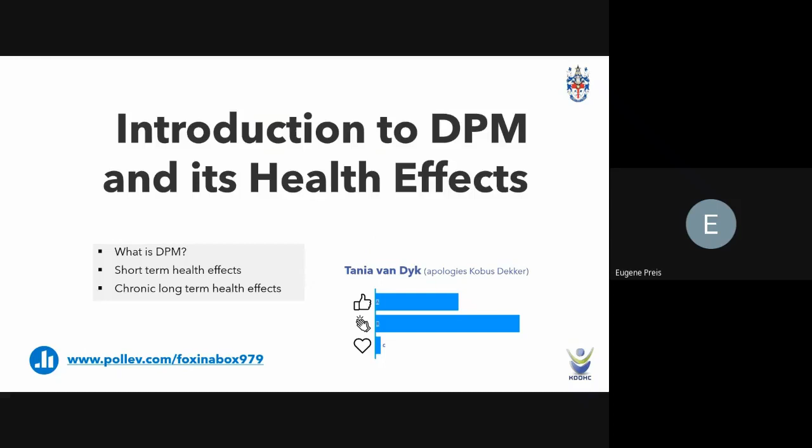What Tanya is going to cover in this section is answering the question on what is DPM, what are the short-term health effects, and what are the chronic long-term health effects. Again, due to a slightly late recording, we missed Tanya's first slide, so on behalf of Tanya, I will just run through this slide for the recorded version purposes.

So we start off this session answering the question, what is DPM? Diesel particulate matter is defined as ultrafine, for example, to have an aerodynamic fraction of less than 1 micron, allowing it to penetrate the lung alveoli. Although the classification of whole DEE exposure as carcinogenic by the International Agency for Research on Cancer only occurred in 2012, the concerns about the health impact that manifests from DEE exposure can be traced back to the 1950s, so it's been going on for a very long time already. The gases associated with DEE, primarily nitrogen oxides or NOx, sulfur dioxide SO2, carbon monoxide CO, and carbon dioxide CO2, are not classified as carcinogens, however have various other health risks ranging from irritation, pulmonary pathology, and chemical asphyxiation.

DPM, therefore, is a complex and variable mixture of gases, vapors, and particles, as you can see on the figure there. Next slide.

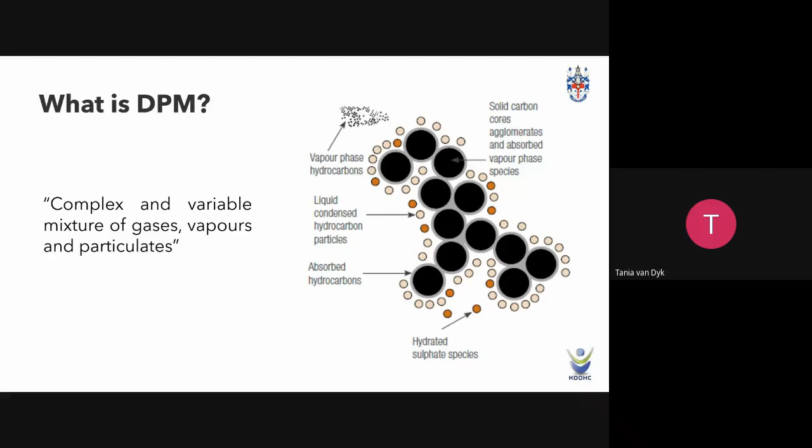So we mentioned that diesel exhaust is classified as carcinogenic and not DPM itself. But since it is very complex to measure and analyze the full content of diesel exhaust for vehicles, DPM was selected to be measured as a surrogate for diesel exhaust. Currently, the magnitude of carcinogenity for diesel exhaust is not confirmed. In other words, we know it is confirmed as a carcinogen, but we are not sure to what extent. Next slide.

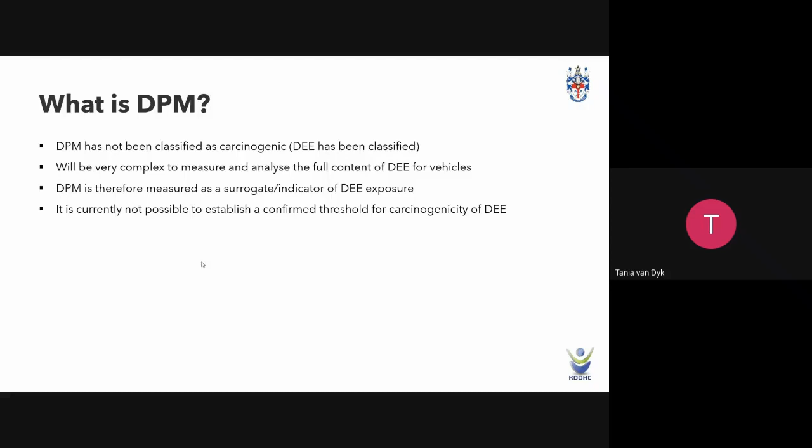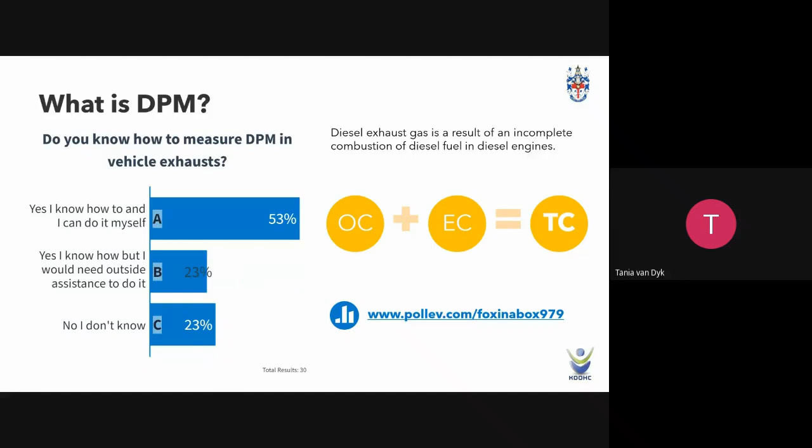So we mentioned that we use DPM as a surrogate to measure diesel exhaust. The reason being that it is a result of incomplete combustion of diesel fuel in diesel engines. In other words, it is selective to incomplete combustion processes specifically. So when we look at the components, we say it consists of an organic carbon and an elemental carbon portion, which adds up to total carbon. We used to look at total carbon as the marker because it represents about 80% of DPM, which makes it a good marker or a good surrogate to measure for.

I see most of you already looked at the question there. At this point, on the left-hand side of the screen, you can answer the question: do you know how to measure DPM in vehicle exhaust? It looks like a lot of us do measure this and do know how to measure this.

Yes, thank you for those responses on the screen. So this was our first in-content question as we discussed earlier on. So you'll see this is how we have brought in the interactivity in the workshop. So as we go through content and you see a question on the slide, whilst the speakers are presenting, you can put your answer in. And if applicable, the speaker will just make a comment or two on this.

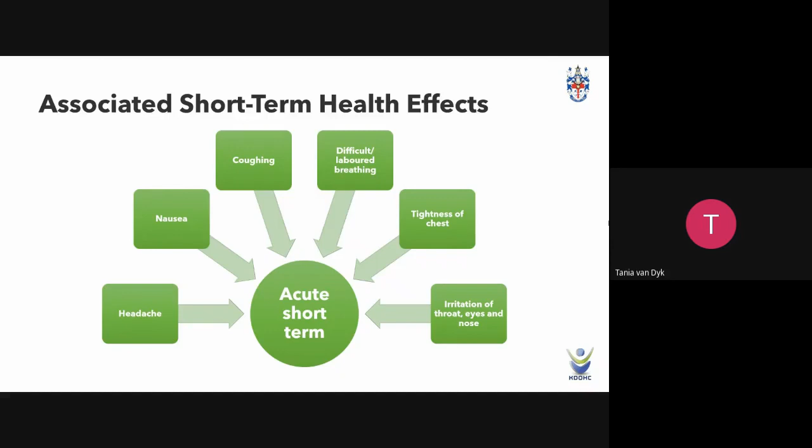Okay, so if we look at the health effects for diesel exhaust, the short-term health effects associated with diesel exhaust may include headaches, nausea, coughing, difficulty breathing, tightness of the chest, and irritation of the nose, throat, and eyes. Next slide.

We know the carcinogenicity of diesel exhaust is the most prominent chronic or long-term health effect. And apart from lung cancer, it can also be associated with cancer of the bladder, the kidney, and the pancreas. Other chronic health effects include asthma, cardiovascular disease, and cardiopulmonary disease, which can include bronchitis and emphysema.

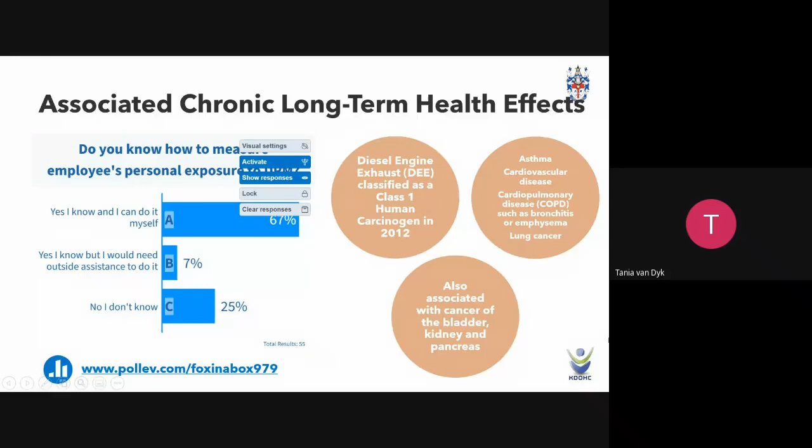So this actually concludes the health effects and the background that I have to say. And then the last question there, do you know how to measure employees' personal exposure to DPM? Okay, thank you from my side.

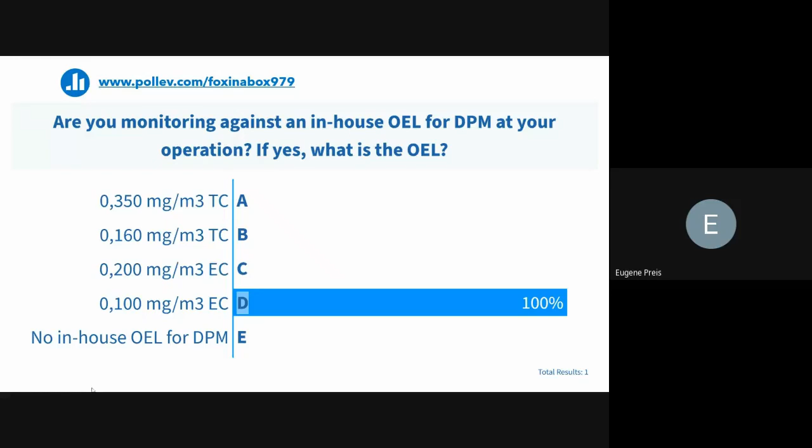So in terms of exposure limits for diesel exhaust, unlike South Africa, internationally, the various countries do have exposure limits and leading practices regarding exposure limits for diesel exhaust. And since diesel exhaust is classified as carcinogenic, the approach in general internationally is to ensure that when you measure levels, they are as low as possible. The context of limits of the various countries is basically based on legislation as well as workplace and economic factors.

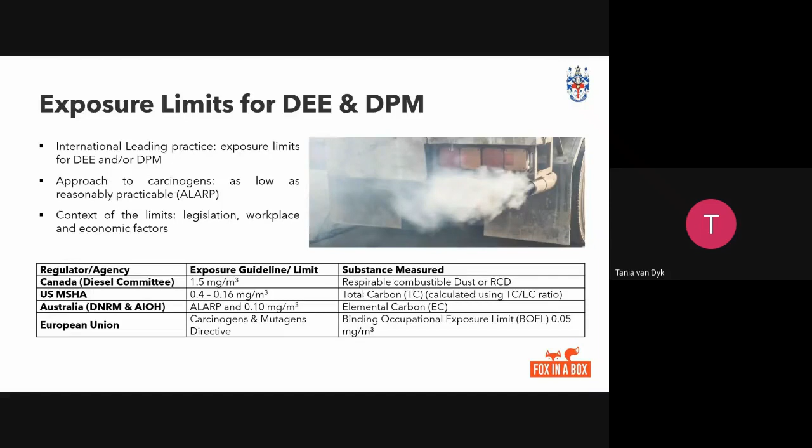The Australians use a limit of 0.1 milligrams per cubic meter measured as elemental carbon, and then the Europeans basically refer to the directives in terms of carcinogens and mutagens. They don't really refer to a specific limit as such. So we can see internationally, although relatively diverse, they do have reference to OELs for diesel exhaust. So the next slide, Eugene.

So we know now where we stand with the rest of the world in terms of OELs for diesel exhaust, but where does South Africa stand in terms of exposure limits? Currently, you won't find any OELs for DPM in the Mine Health and Safety Act. The only reference to limits are the ones for the gaseous component, and that is in Schedule 22.9.

The Mine Health and Safety Council, however, issued an advisory note in 2013 where they proposed a phased-in approach to gradually decrease limits from 0.35 milligrams per cubic meter to a limit of 0.16 milligrams per cubic meter, measured as total carbon over a period of time. So it's like milestones that were set where they want us to reach a limit of 0.16 milligrams per cubic meter.

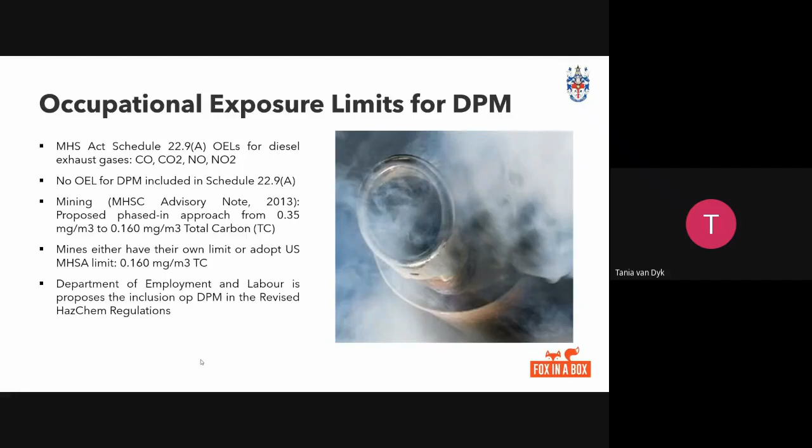So this is the approach from the mining perspective, and from the Department of Labour's perspective, they also propose to include DPM in a revised HazChem regulation. That's still in process. So the next slide.

The Mine Health and Safety Council launched a project whereby the current airborne pollutant exposure limits are reviewed, and although not finalized, a workshop was held in October 2020, and the following recommendations were made regarding exposure limits for diesel particulate matter. They recommend, firstly, the inclusion of DPM as a new pollutant in the Mine Health and Safety Act Schedule 22.9. They also recommend the limit to be 0.16 milligrams per cubic meter, measured as total carbon, as well as a respirable fraction. And they propose to note it as a confirmed human carcinogen as well.

So this is basically a summary of where we stand currently in South Africa in terms of OELs for diesel particulate matter.

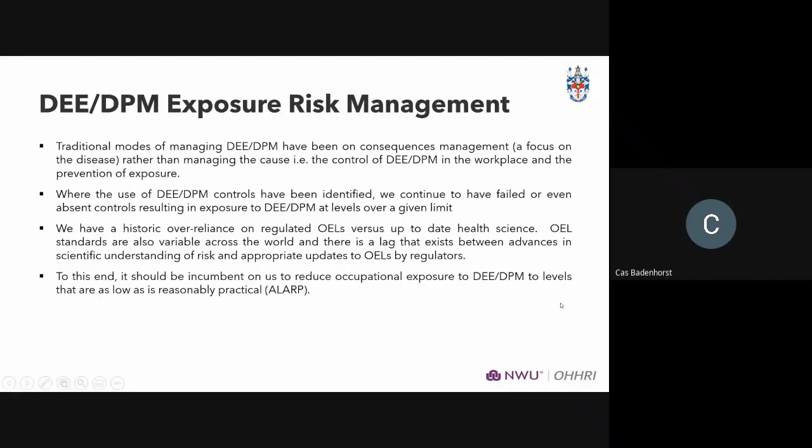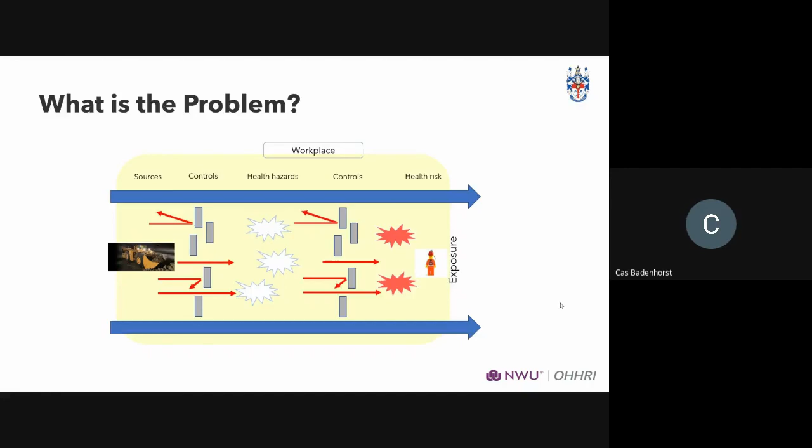Okay, so whilst you get going with the questions there, in terms of DPM exposure risk management, we use exactly the same tools that we'll use for any other airborne pollutant or health hazard we deal with in the workplace.

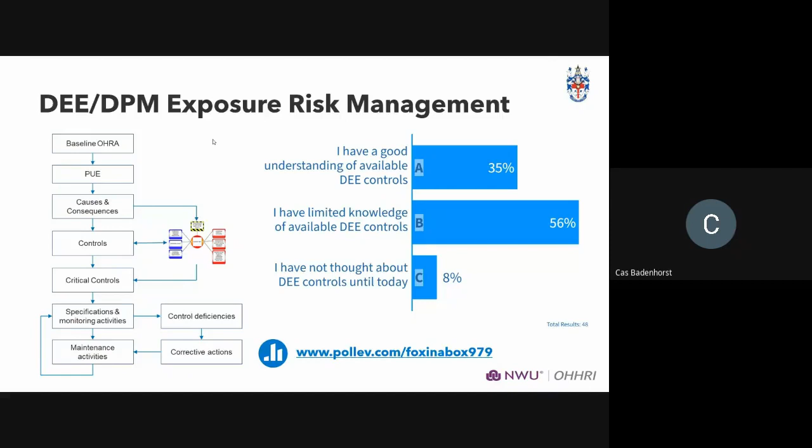So just to simplify that very complex flowchart there, we've got an unwanted event in the middle. The unwanted event in this case is actually DPMs being emitted from an engine. That results, as I indicated previously, in a hazard, being DPM presence in the workplace and employees getting into contact with that DPM. We can either put in some controls that will prevent DPM being emitted from the engine, so that is our preventative controls. Or we can also put controls on the right-hand side to actually eliminate or manage exposure if we can't prevent the emission. Those are called mitigation controls.

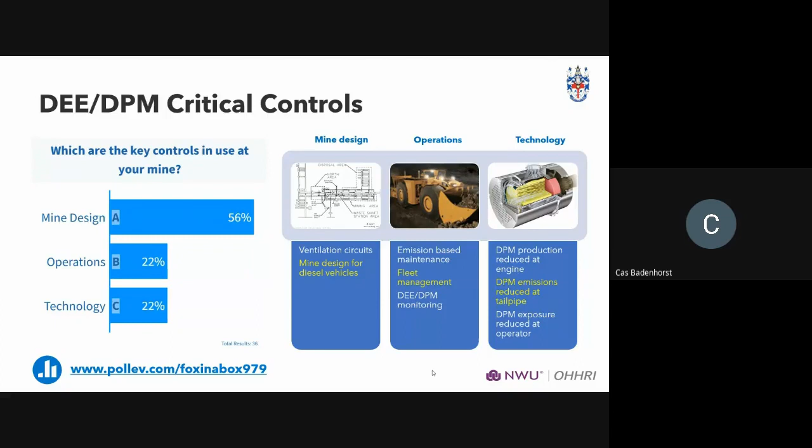I think at the time, the industry realized that it is quite a challenge and we need to join hands and partner up with equipment manufacturers. Next slide.

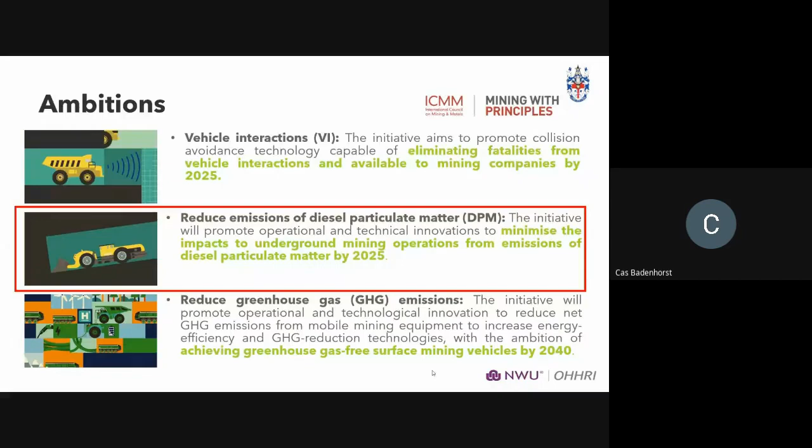So this is quite a unique supply chain collaboration. And I haven't seen many similar collaborations across the world, where it's actually led by the CEO leadership from the participating mining companies, as well as the CEOs from the OEMs. So at the highest level of an organization, these initiatives are driven, and it just demonstrates the initiative's importance and helps to accelerate the pace of change.

Secondly, it's a safe space for OEMs and mining companies to work openly, to help develop solutions and overcome silos within the industry and between companies, while still operating under anti-competition and antitrust rules. And thirdly, this collaboration represents a third of the mining and metals industry, giving the ICMM convening power in achieving these ambitions, as it builds the widespread confidence needed to accelerate the level of innovation investments required to scale up commercial solutions.

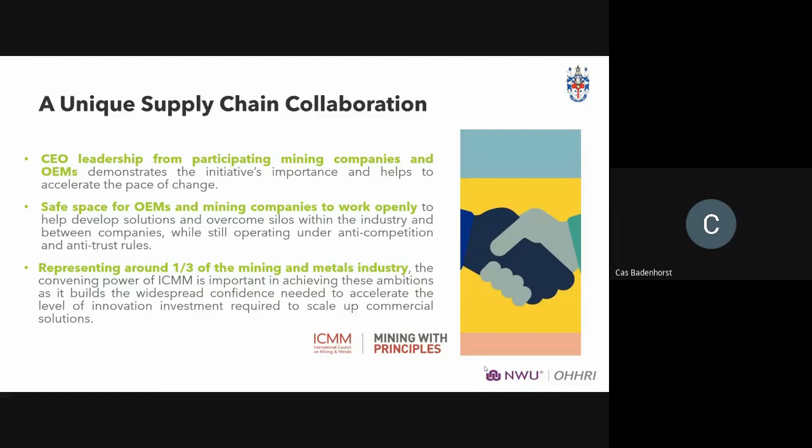So very often in the past, what we've experienced is a single company talks to a single supplier to try and address the issues. And for these big equipment manufacturers, there's no commercial power in listening to one customer. But when you pull all the customers together and all the suppliers together, you're having a much different and much more enriched discussion around getting to a solution. Next slide.

So quite an innovative approach was followed. Quite a large group of these partners got together in London about two or three years ago, representatives from the mining houses, representatives from the equipment manufacturers, both health and ventilation colleagues, but also engineering colleagues, maintenance colleagues. And the group spent about three days together to really unpack DPM and DPM generation, not only from a mining operator perspective, but also from an equipment manufacturer's perspective.

The workshop then spent time to understand what needs to be done, and how do we collaborate in getting it done by 2025. From that workshop and discussions, there were a number of controls identified which the industry, together with the equipment manufacturers, believed would provide the biggest impact in the shortest time span. Next slide.

So all of that is actually available on the ICMM hub. ICMM refers to it as a knowledge hub. You can see the link there. You can follow that link, and that will bring you to a landing page, which is the copy here. And you don't need to be an ICMM member. This is in public space.

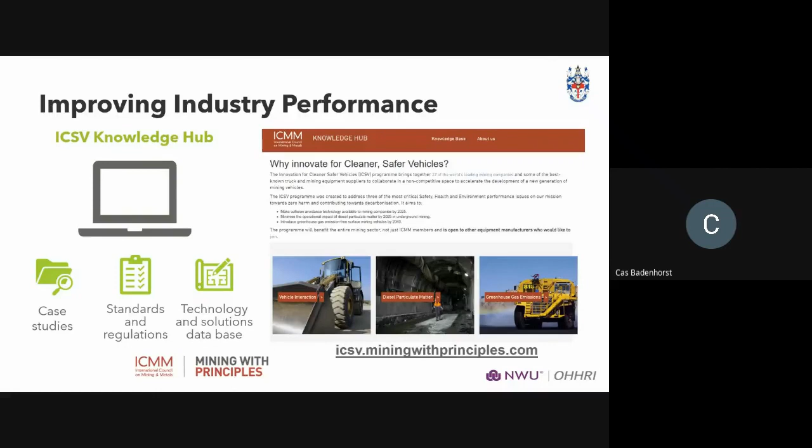What we've developed is referred to as a DPM risk management maturity framework. Under this ICSV initiative, we developed maturity frameworks as change tools for mining companies to map current positions, motivate action, and measure progress.

You can use this tool to start building your business case or value case for your manager, site, or company on how to change and mitigate your DPM in the long run. We've got three main buckets of controls: mine design, operations, and technology. Under them, substreams like ventilation circuits, supportive infrastructure, fleet management, exposure monitoring, DPM production reduced at engine, DPM emission reduced at tailpipe, and DPM exposure reduced at operator.

On the columns, we show what each of those controls would look like at its most immature level, level one, basically how the control looks when you've got nothing in place, up to a top level of maturity, level five, where we've got zero emissions. So how would we expect ventilation circuits to look at zero emissions, or how would your fleet management look? On the website, these are all interlinked, so if you click on any highlighted item, it takes you into the underlying definitions and explanatory notes of exactly what it means.

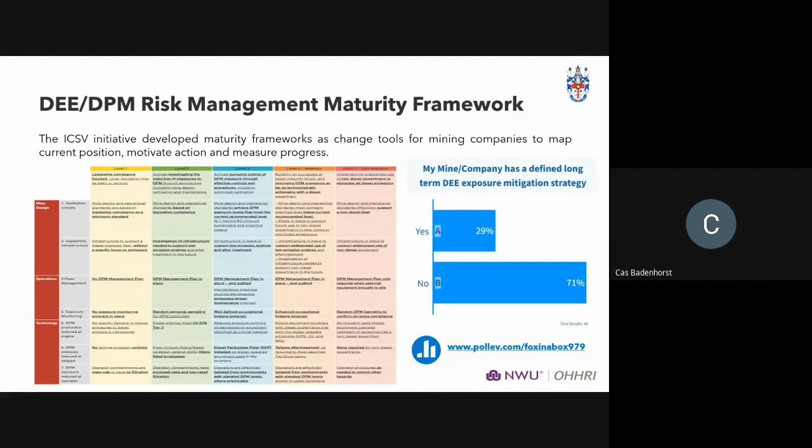As an example, I've taken the engineering control version and blown it up a bit. Looking at DPM emissions reduction at tailpipe: at level one maturity you'd have no tailpipe emission controls, at level two there are some more controls, level three even more, and at level five, zero emissions, you actually don't require DPM tailpipes because you're on non-diesel powertrain arrangements.

With this, you can benchmark your operations or site against this self-assessment. This is an example from one of our Anglo-American operations, where red indicates the current status of that operation as of 2020. We've plotted it in a simple view, and then shown where we want to be in the next few years.

This also gives you the opportunity to decide which controls to push hard, since some current operations restrict certain controls. For example, in DPM exposure reduced at the operator, that refers to enclosed cabins on diesel-driven equipment. The current status at that operation is open cabins, since it's a low operation. But changing the equipment or mine design to make enclosed cabins feasible is not a feasible option.

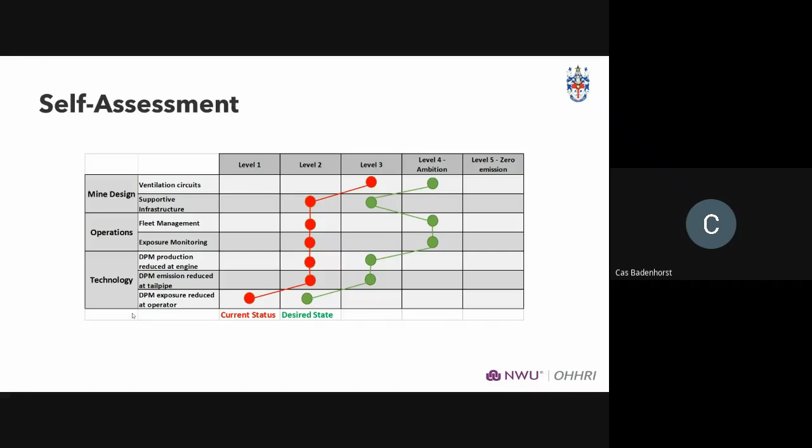So some of the takeaways from my side: I think we really need to understand the controls available to us, and that one is not better than the other. Marco will share a lot of information with us around what controls are out there and how to manage them. I think it's important to understand where you are as a company or site in terms of your maturity towards elimination of your exposure to diesels, and where you want to be by when.

I think it should be a discussion around the business value and the impact of the various controls as well, so it's not just around putting a control in place. The study I referred to earlier, the case study, is available on the ICMM website. It's a case study from Wollongong University with a South 32 operation down in Australia.

And the focus was around the value of emission-based maintenance as a control for diesels or DPM emissions. The study has clearly shown that by having a detailed emission-based maintenance program, firstly you actually reduce the number of breakdowns you've got in the phase, therefore increasing operational efficiency and operational time.

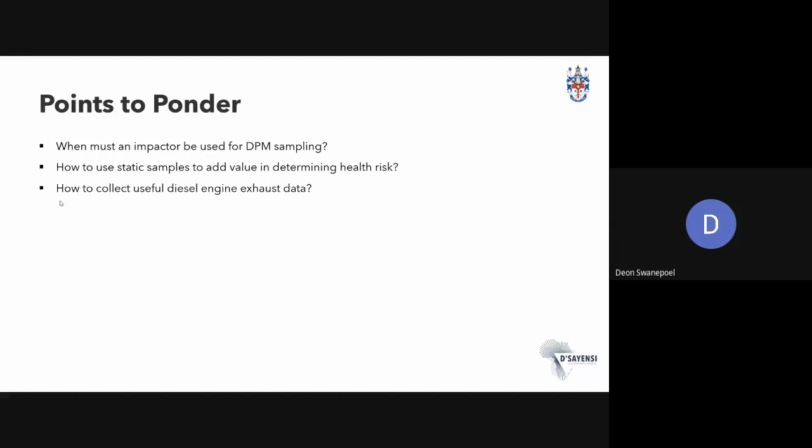This session I'll be looking at personal monitoring, including inorganic gases, organic vapor, and the DPM portion, and then also the fundamentals of source monitoring. As a disclaimer, today's session is geared more towards transferring knowledge to our young professionals - the 50% of people who say they are not 100% comfortable with DPM sampling on their own. But I do hope there'll be some knowledge for everyone, a key takeaway.

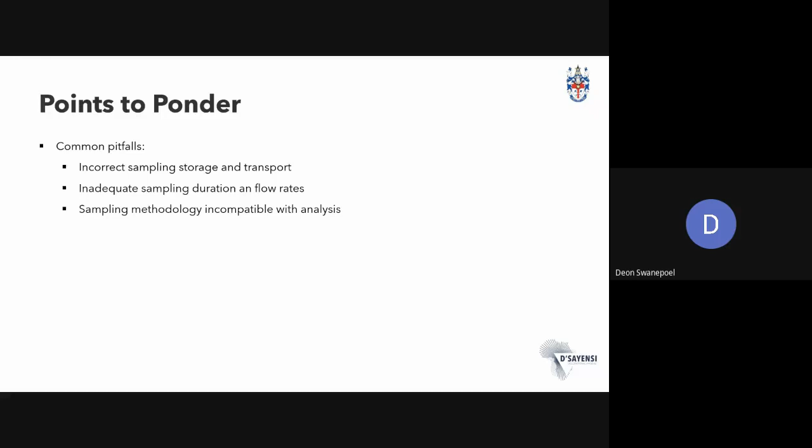The very fundamentals of exposure monitoring - we take our samples within the breathing zone, so we have a 30 centimeter semi-hemisphere from the nose. Hand in hand with that, our sampling duration must be sufficient to represent our exposure duration and to collect enough of the pollutant we're investigating. This principle applies for all the hazards that pertain to diesel engines.

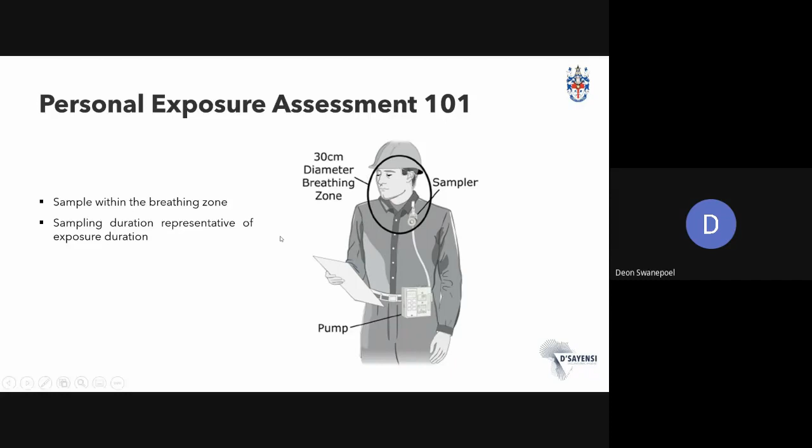When we look at our inorganic gases, carbon monoxide and dioxide, we most commonly use direct reading instruments for monitoring. I'm not sure if you ever wondered why - my takeaway is a high dose will induce an immediate effect that could be fatal. Actually, we want immediate results, we want early warning, a warning before a person is exposed to a high dose that could be fatal or have an acute health effect. We don't want that information two weeks after the exposure occurred. Where we anticipate high nitric oxide or dioxide exposure concentrations, it's also recommended to use a direct reading instrument. Alternatively, there are passive and active sampling options for NOx sampling.

When we look at organic vapor, for volatile organic compounds, we have an option of either an active or passive sampling method. NIOSH 2549 is an active sampling method, and what's cool is it's a screening method that quantifies a large range of compounds, including benzenes and aldehydes, both associated with diesel engine exhaust. For polyaromatic hydrocarbons, the method I'm most comfortable with is NIOSH 5515. It uses a filter and a sorbent tube in series - the filter collects the particulate PAH portion and the sorbent tube collects the more volatile portion. I'm not aware of any passive sampling options for PAHs.

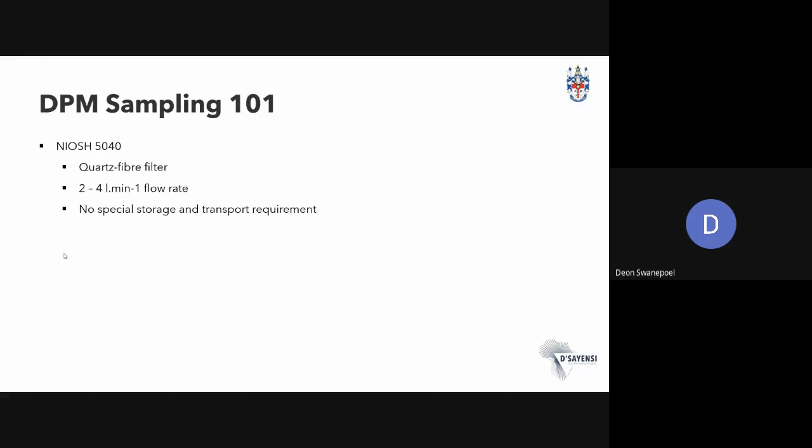So the good news is it doesn't really make a difference to the results which approach you use. A study done by Pretorius and Grevie indicated that all three methods would give you similar results. So it becomes a question of dealer's choice. Something to take note of, open face sampling is prone to tampering either by adding foreign particles or operators with curious fingers that start poking at your filter. Personally, I'm a fan of using a cyclone, and the reason is you get a more even deposition of the pollutant across the filter. And also it prevents them wandering fingers from fiddling with your filters.

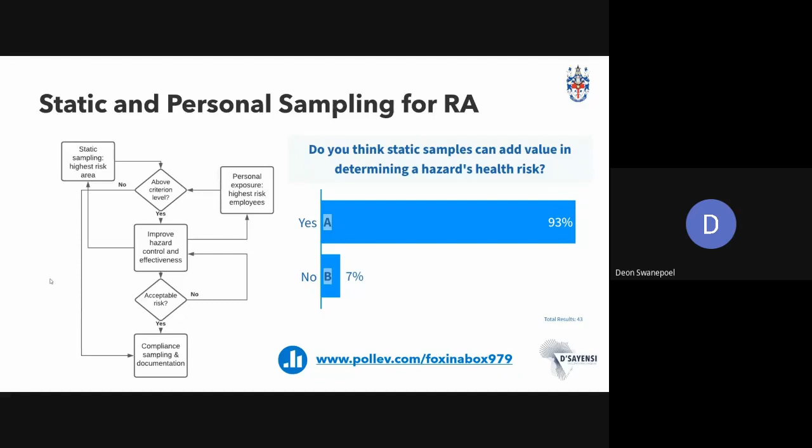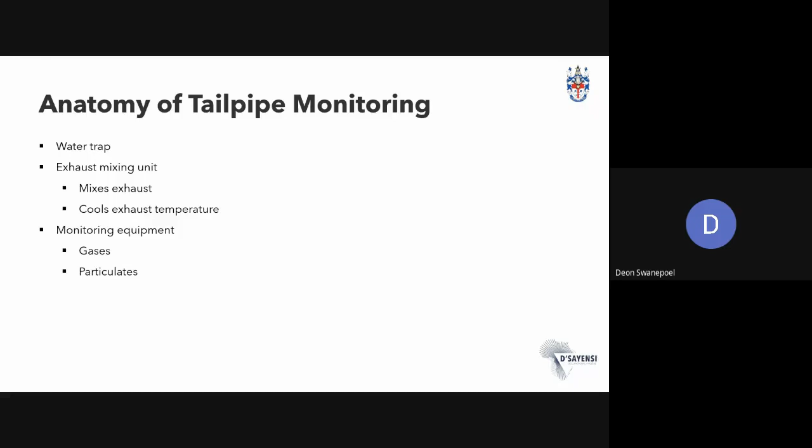Cool. Next slide, please. We're going to move over to source monitoring. The basic constituents of tailpipe monitoring are a water trap, and the name is fairly self-explanatory: it reduces the moisture in the exhaust. An exhaust mixing unit, whose purpose is to get our exhaust gas mixed homogeneously and also to cool the exhaust gas temperature. And the final component is our monitoring equipment for either the gases or particulates that we want to investigate. Fantastic. Cool stuff.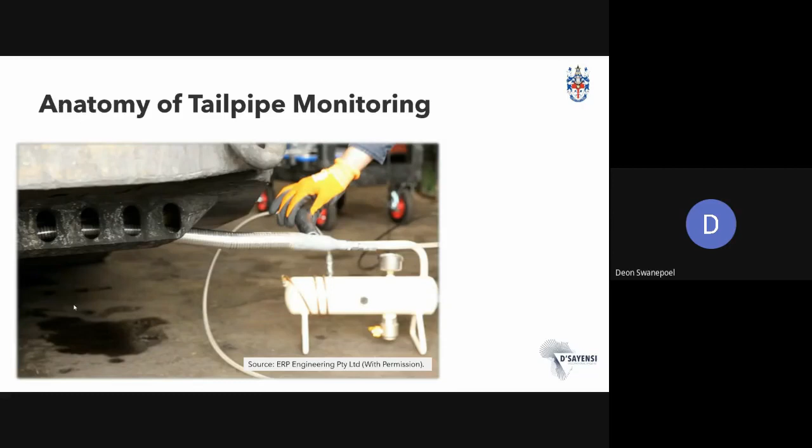Thanks. So here you can see a probe going into the tailpipe, and from there, off screen, it will go into a water trap and then into the mixing unit in white at the back with the copper heatsink. So this is almost the ideal approach. And what you'll find quite often is that the probe is directly connected to a gas or other instrument, which I'll elaborate on a bit later, but it's not good practice. The next slide, please.

So here you can see all the different components of a tailpipe monitoring system. At the right, the silver is the water trap that reduces our water vapor. From there, it goes into the mixing unit that also cools the exhaust temperature, and the hazards we're looking for, the components of the diesel engine exhaust, are measured from the mixing unit. So it's not directly measured from the tailpipe.

So some of the biggest pitfalls that I've encountered so far is measuring with the probe directly connected to sensors from the exhaust. The first reason it's a problem is there's a good chance you're going to burn your filter, your sensors. Then there's also virtually no repeatability or intra-vehicle comparison, because your velocity within your exhaust changes if there are any bends in the system.

So if you're taking a measurement directly from a tailpipe, there's a good chance that the placement of your probe will influence your results, which is not scientific at all. The reading can't be dependent on the placement of the probe. And if you're going around a bend, you'll have different velocities and different mass flows, which will in the end influence your results. Eugene, just go to the next slide for me, please.

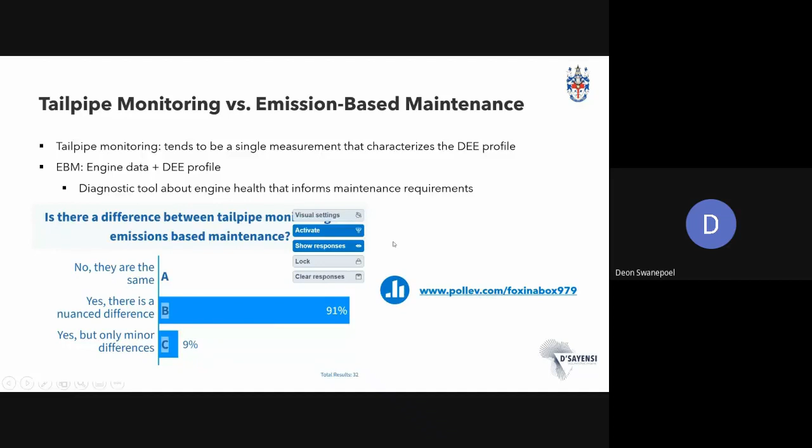So you get a diesel engine exhaust profile. You get an idea of what is coming directly from your engine, be it your particulates, carbon monoxide, and then one after the after treatment. So if you don't see a reduction before and after your after treatment, you know that either you've got a blown out filter or after treatment, or there could be various other mistakes. But the point is, it gives you something to compare to, as opposed to only taking one measurement and making a call whether you're happy with the result at the end. So definitely

even though we use it interchangeably, emissions-based maintenance is definitely a broader program. The whole purpose is to make a decision regarding maintenance and how to change that profile. So it's not a once-off measurement that you've evaluated against a specific criterion. You could have internal standards to evaluate it against. That's not the problem. The point is, especially if you're using technology, you want to have an idea of how well my engine is performing, how well my after treatment is performing. I think that this should be my last slide.

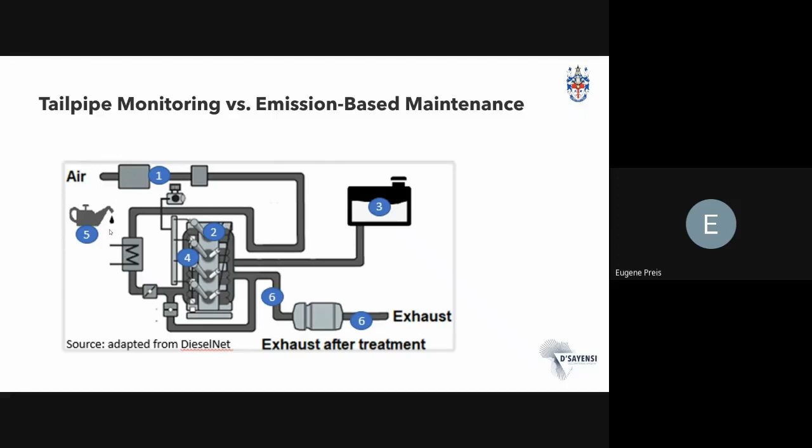Deon, before we check, just a comment from Marco in the chat box, saying he also agrees engine duty cycling also plays a part. And that was your last slide, but you're welcome to add to what Marco said if you see it fitting. I don't think I can really add anything. I mean, he's absolutely correct.

Thinking about emissions-based maintenance in the broader scheme of things, it also contributes to what Prof. Kas was saying a bit earlier. The first form of control, one of the steps of control, is to get your engine to emit as little as possible. So directly from your engine, you want to have as little carbon monoxide as possible, because that means you actually have proper combustion. So that's where your fuel consumption saving will come from. You want to have your particulates as low as possible from the engine.

And then only after that, your after treatment comes into play to further alter or manipulate the constituent that you are having control over. So no, completely agree with what he's saying. It's a fascinating topic, but it's definitely not just a quick jam a probe with a sensor into an exhaust tailpipe, get a result, and then move from site.

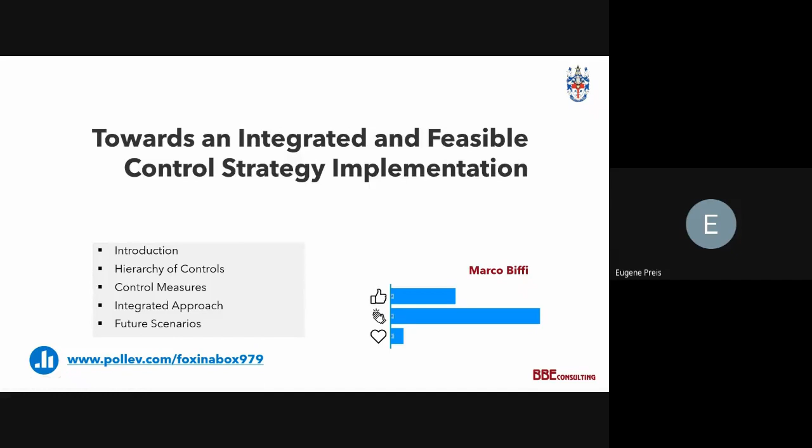Thank you, Eugene. Good morning, everyone. I'm Marco Biffi. I'm a mechanical engineer by training, but I spent over 35 years in mine ventilation and a couple in industrial ventilation and air conditioning systems. So what it means is that I am a jack of all trades and definitely a master of none.

And I hope that going through this presentation, it's going to help putting together some of the thoughts that I've had over the years and shared with the likes of Prof. Badenhorst. We started looking at this, I think, in about 2009. And we finished doing this together in 2019 when we started with the ICMM subcommittee. And then I retired after that.

So we'll go through a brief introduction. We'll look at the hierarchy of controls, and I want to take this from a different angle, perhaps than what Kas has covered. And then line up with an integrated approach. In doing the hierarchy of controls, can you go to the next slide, please, Eugene? I want to look at things also from a perspective of elimination very briefly.

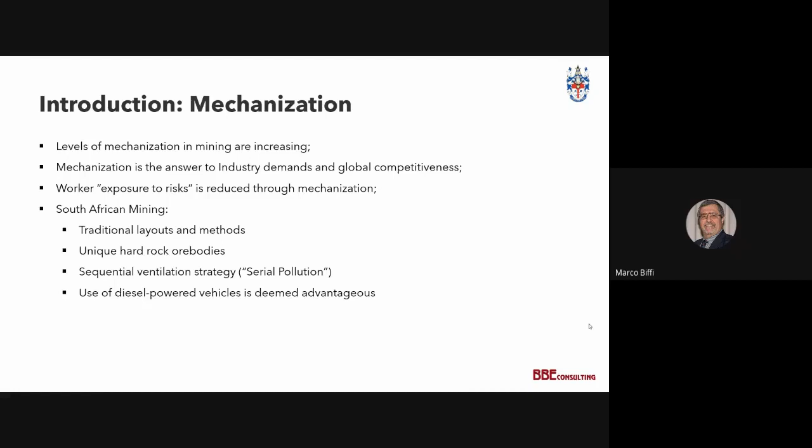So in terms of the hierarchy of control, in terms of elimination, we will look at diesel-free equipment, and that's something that we need to perhaps consider for new projects. And there may be some answers there that don't necessarily mean batteries. Anyway, we would like to then, in terms of substitution, look at diesel engine technology options, which you'll see package everything in one.

In terms of engineering the existing equipment, we should be looking at low-emission diesel fuels, lubricants, and additives. Anything that gets burned in that engine could become a nucleus for the attachment of carbon, metals, and other substances that can then enter the lungs. Exhaust after treatment is a very good way of handling that.

Equipment maintenance, in terms of emissions-based maintenance systems, as was discussed earlier, and of course that needs new competencies and equipment, and ventilation system design. Again, if we could use ventilation on demand and bring in fresh air for every panel in a bord and pillar platinum operation, we would have a lot less in terms of problems than we're having at the moment.

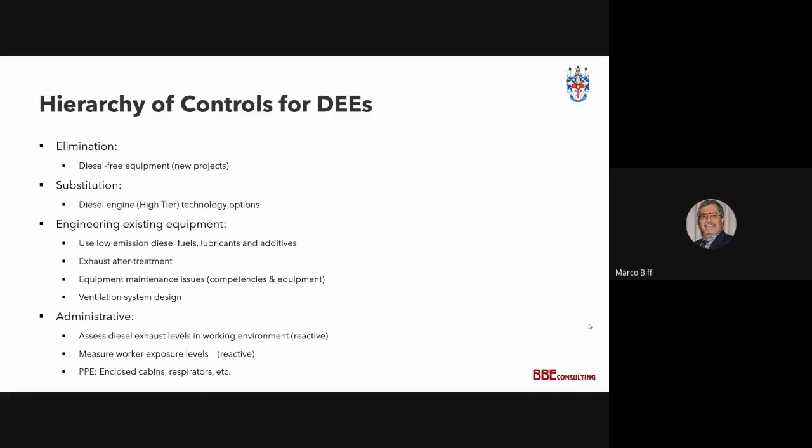So where we are at the moment is that we have mobile equipment and we use tier 1, tier 2 diesel engines. We can talk about tier 3s in a second. And we go to 50 or even 10 ppm diesels in the hope that will improve things. Exhaust filtration is added in most cases, especially the older equipment.

And if you're in a narrow reef operation using ultra low profile equipment, you will find there is usually a problem to fit exhaust filtration systems after the machine has been manufactured. And failing which, we try and dilute as much as possible using ventilation, and hopefully we're using air that's not being used somewhere else where a diesel engine was operating, and then we go for respiratory protection if that is necessary. And you'll see that we can use enclosed cabins, if necessary, as well with filtration.

Next. Now, going a new route is very similar, but we can use higher specification engines, which are kind of pre-packaged, if you will. And as I said, we'll chat about it in a second, with ultra low particulate diesel. Next, please. Alternatively, you can look at electric, which means battery or fuel cell driven.

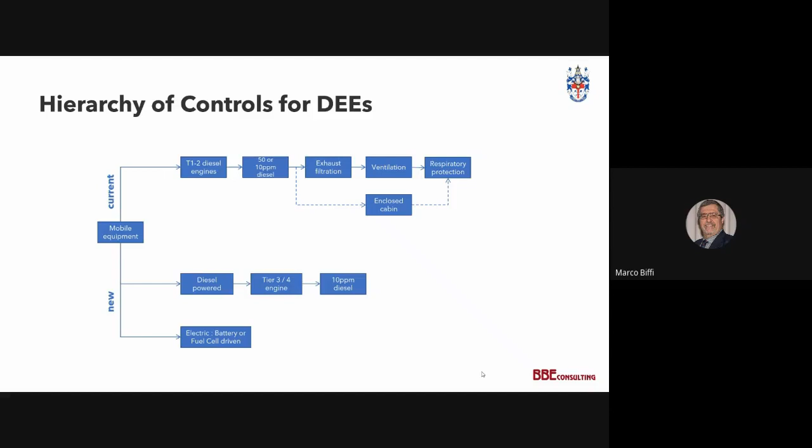Next, at the moment, we are stuck in what I call the diesel paradigm, certainly for the short to medium term. Next, please. So let's start from the bottom. What can we do right away? In my opinion, electrical hybrid units are probably the best. If you think of this LHD as a good tram, even in our narrow reef operations, they've come to substitute scrapers. So it just moves up and down in a straight line from the bottom of the gully and tips into the ore pass. There's no reason why we could not tether the unit by means of an electric cable.

And what I mean by it is a small diesel engine, which will allow the unit to move from one gully to the next. But when it does mucking and loading, that's when the most diesel emissions are generated. That's when the most heat is generated. So if we can do that by means of an electric motor, which is plugged into the wall, why not? Next slide, please.

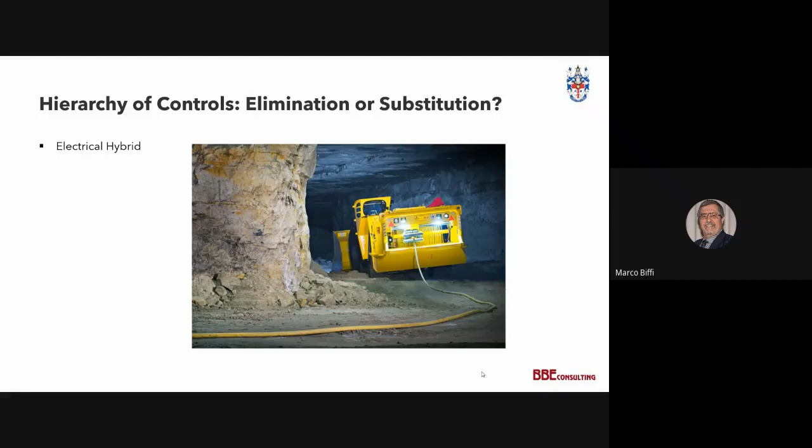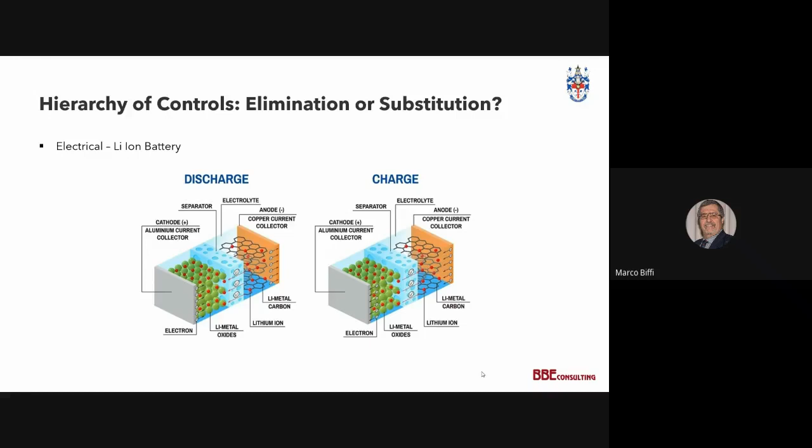Okay, let's very briefly talk about lithium-ion batteries. Lithium-ion batteries are basically rechargeable units. We use them in our cell phones. We use them just about anywhere. And it's just a question of running a current through to charge it, and then when it discharges, it will do the work that is necessary. Next slide, please. Okay, let's concentrate on the picture on the left, which is less busy than on the right.

Fuel cells. Fuel cells are an electric absorption system. The fuel that comes in on the left at the top is a metal hydride, which releases hydrogen as it goes past the anode. And that is due to the presence of a catalyst, a platinum catalyst. Now the hydrogen is then split into electrons and positive hydrogen ions, as you can see there. The electrons basically go away and do what electrons do in a current, which is move the motor and return to the cathode.

The hydrogen ions then migrate to the cathode inside the cell, and we then supply air, as you can see on the right-hand side, which is rich in oxygen. And again, through the action of another catalytic membrane, the oxygen reacts with the hydrogen ions to produce water vapor, which gets out of the exhaust. Now, the only other thing that needs to happen is that the fuel that you see leaving on the left-hand side at the bottom has to be recharged with hydrogen, which is this metal hydride fuel. It's almost like you have in refrigeration absorption plants where you have ammonia being desorbed at different temperatures.

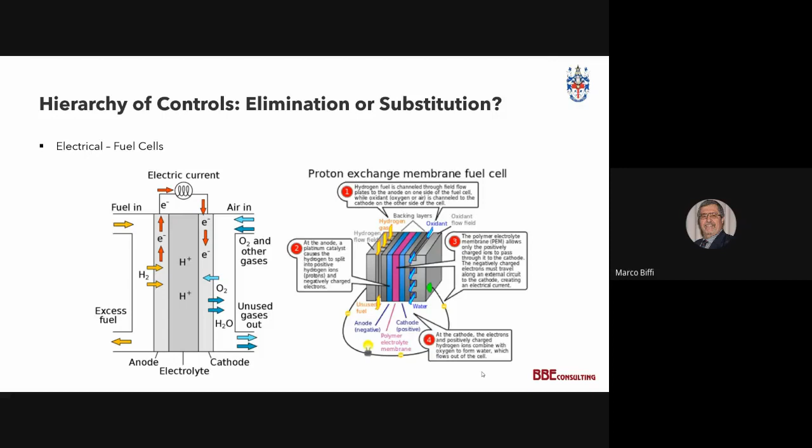The point I'm making here is that somewhere along the line, in the mine or on the mine, there has to be a metal hydride tank to be able to replenish the hydrogen.

So far, if we're talking about elimination, it requires quite an intensive and effective change management effort. Will take time, resources, and planning. It's starting now, especially if you're working on an operation which has 20 years ahead of itself. It's mechanized with diesel. You can maybe schedule the entry of electric equipment into your mine, with an exchange when the diesel equipment is due for change.

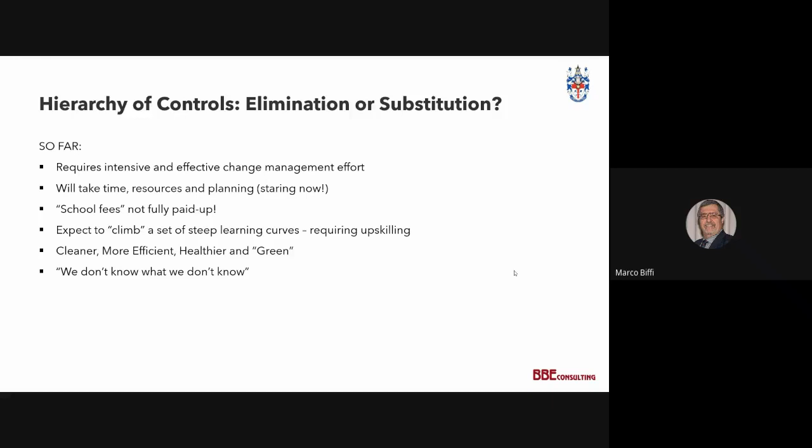Next slide please, I think it's a question. So the question is—sorry, Eugene, you take over at this point. Thanks, Marco. You're welcome to proceed, but I'll take this one.

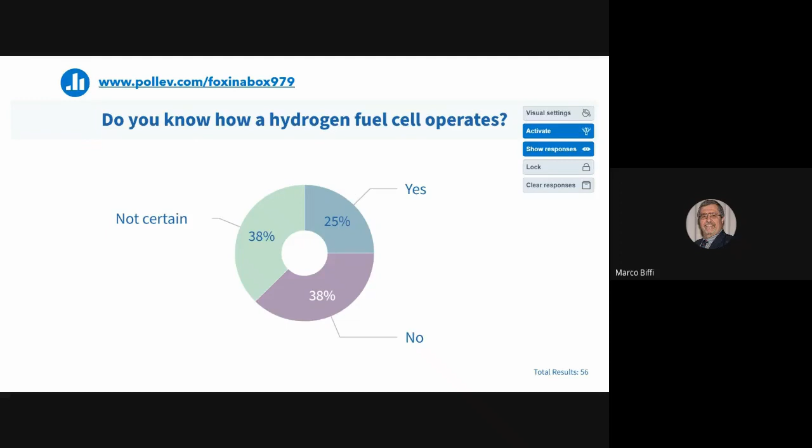What I wanted to say with the next slide is that we don't know what we don't know. And this is what happens. This is probably the first battery electric vehicle fire on record, or at least it has been investigated. What it is, it's a cassette unit. The engine is up in the front, so the battery is sitting in the front.

There are 3 batteries, and on the right is a picture taken by the 2 technicians who were there when the fire started, and they were fortunate enough to take this picture and come out of it alive. This is in North America, by the way. What happened here is that the battery released all the energy stored in those 3 batteries in a very short period of time. You can see the rubber and everything else burned on the left-hand side, but the back of the unit is pretty unscathed. The fact that these guys were sitting at the back meant the airflow was from their back towards the fire, and that's why they made it out alive.

But again, it's things that we need to learn about how to manage these very, very powerful batteries.

May I suggest that even batteries used in normal diesel units should have some kind of fuse. If they start running away, they release quite a lot of energy.

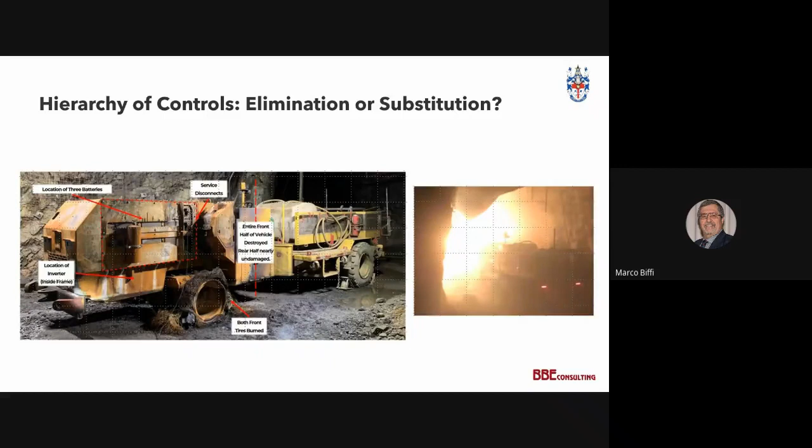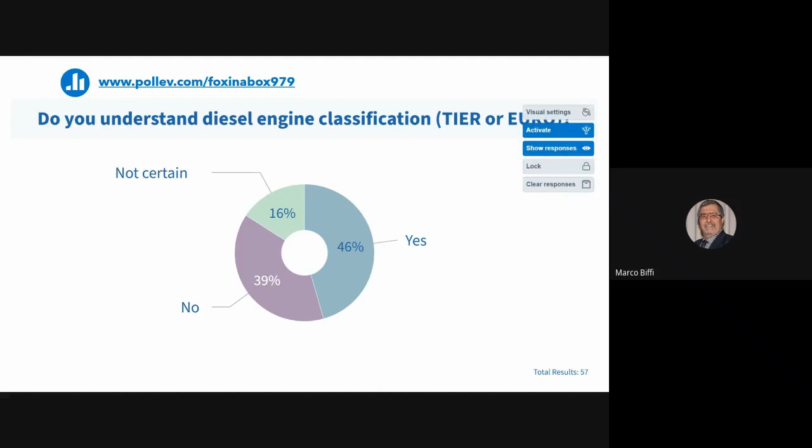Okay, can we go to the next slide? This is what I want to talk about now, diesel engine certification. Having accepted that we're going to have to live with diesel engines for a while yet, we also need to understand what can be done to minimize the risks to acceptable or reasonable levels. I'm using the ICMM wording, which links into the definition of carcinogenic substances.

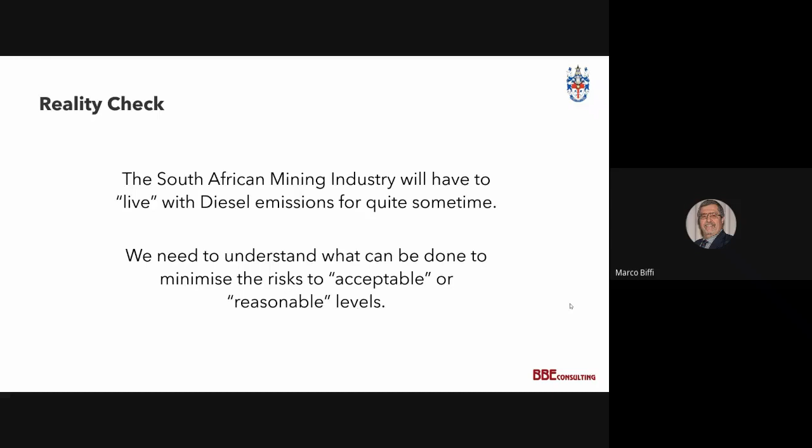This is a picture showing what engine certification is all about. On the left-hand side we start with tier 1. In terms of certification, one looks at the production of particulate matter, the vertical axis, against the nitrous oxides produced by the engine as it undergoes a bench test. The green block represents non-road vehicles in the range we use in our underground mines. When it went from tier 1 to tier 2, there was a 20% reduction in hydrocarbons and NOx, and a 50% reduction in particulate matter.

So for a tier 2 engine, the emissions in terms of particulate matter, in grams per kilowatt hour of engine energy emitted, are around 0.4 grams, whereas the NOx and hydrocarbon is going to be less than 6 grams per kilowatt hour. The others you can see how they reduce, and a comparison can be made between a tier 1 engine and a tier 4 engine in terms of those emissions.

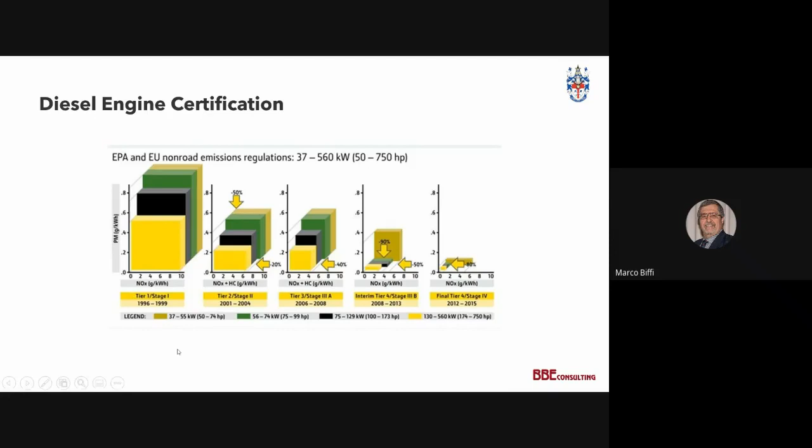Can we have the next slide please? Okay, this is a final tier 4 engine. What's important here is to look at the complexity of this. You've got the block, air coming in, it goes through a turbine, then through an aftercooler. It mixes with some of the exhaust coming out of the engine via the EGR cooler, to make sure whatever particulates haven't been burned get introduced again, comes out of the exhaust through the turbine, and then enters that little cylindrical filter, the first cylinder, which is a DOC DPF.

The first one is a diesel oxidation catalyst, which attempts to get rid of carbon monoxide through oxidation. Then the DPF is a diesel particulate filter, and then it goes through yet another set of filtration, the selective catalytic reducer, which uses an ammonia oxidation catalyst to convert mainly NO2 to NO.

The DEF tank is the diesel exhaust fluid tank, which those of you riding Euro 6 diesel motor vehicles may be familiar with. That contains ammonia, and that is essential. So you can see there's a lot of controls going on to try to get rid of the carbon monoxide in the first stage with the diesel particulate matter, and then going through the next stage to oxidize the NOx into NO, and reduce, not oxidize.

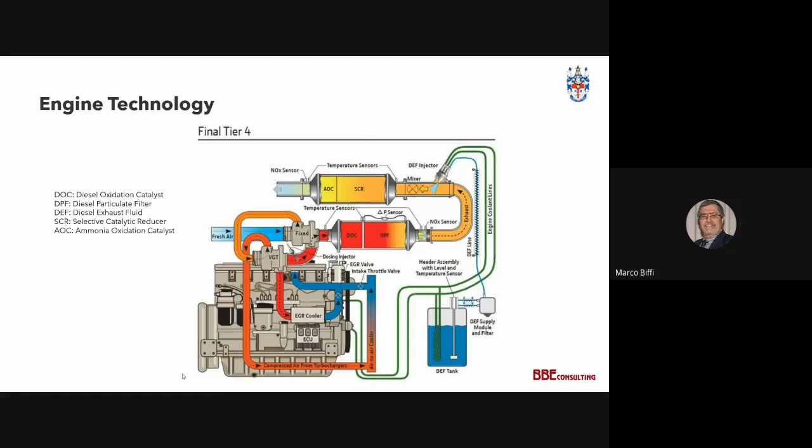Okay, here we come to the question that Andre was looking at. This is work that we did at Anglo American with Sasol and Deutz Diesel, and with the CSIR. It was a set of tests done in 2016 where we looked at the performance of a number of things, different types of fuels with the same engine, which was a Tier 1 engine, and different types of diesel particulate filters.

This is in its simplest form, the basic one, which is a diesel oxidation catalyst with a sintered metal filter, that's what SMF stands for. What we could achieve here is a 30 to 60% reduction of particulate. Here we were focusing on particulate matter, but the paper presented at the MVS conference in 2016 provides all the results for the gases as well. We had a 30 to 60% efficiency based on the type of fuel we used.

What I want to say about fuels is diesel engines are a typical example of garbage in, garbage out. And the garbage out is DPMs. So the important thing is that the quality of the fuel is very important. We looked at biodiesels as well, I wouldn't scream too much about them. I think 10 ppm or less sulfur, if you can get it, is good for your engines, whichever ones that you use.

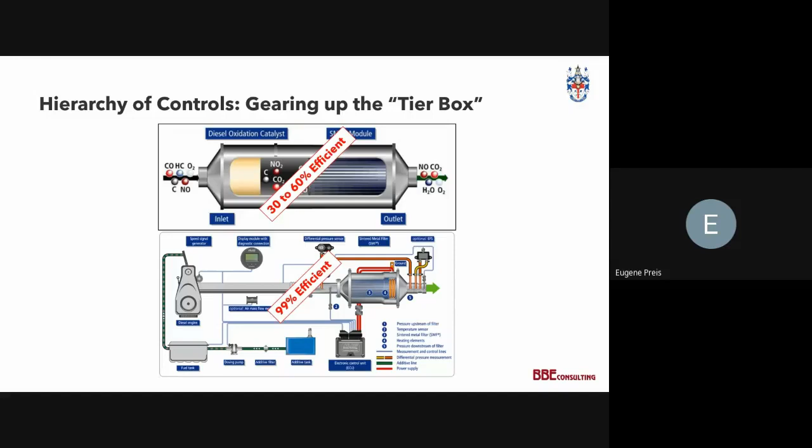Great, Marco, thank you for that response. I'll get to the next slide for us. Okay, so how are we going to be talking about instruments? How are we going to integrate this?

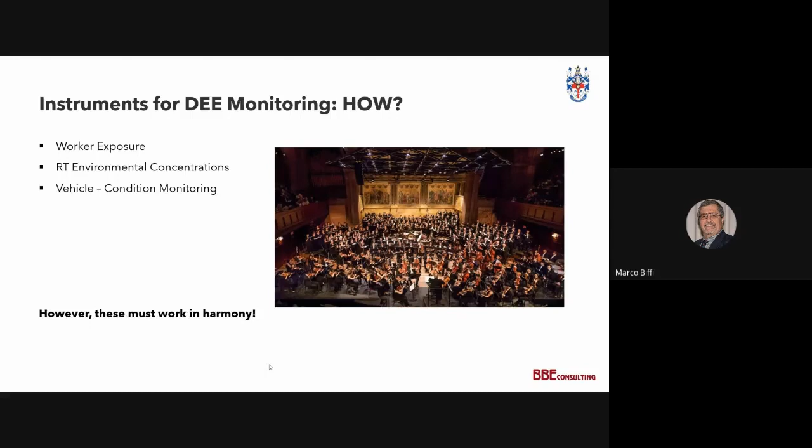We got instruments that measure worker exposure. There are instruments that do real-time environmental concentrations, and there is vehicle monitoring instruments, the tailpipe ones, the emission-based management ones. So what's important here is that we got 3 sets of instruments that measure 3 different things, and we want them to work in harmony. Schematically, we have an engine underground with fresh air flowing over it.

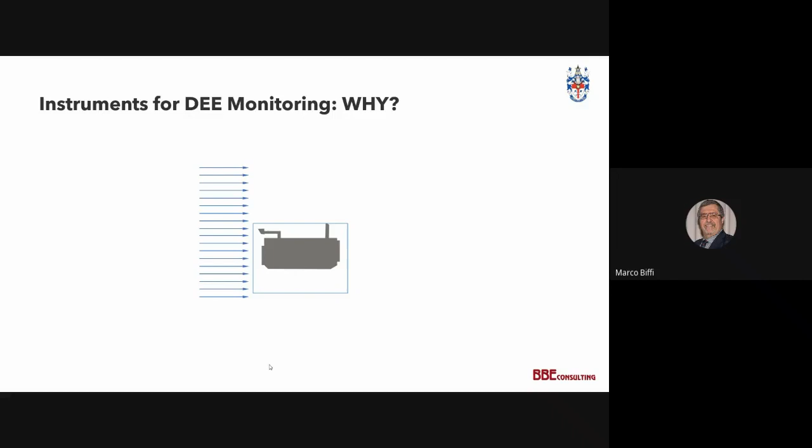Now, nothing happens until we put a spark in that engine and we add diesel fuel, lubricants, and additives. And what comes out is heat, nitrous oxides, carbon oxides, DPM, and water vapor. Now, the worker that's on the right-hand side gets immersed into this cloud of dirty air, which is hot as well, and he starts breathing the particulates and the gases.

Next click, please. So here what we can do is we can look at engine technology, as we said just now, fuel quality, and exhaust after treatment, which will take care of the particulates, the carbonates, and the nitrates. Okay. Click it again, please, Eugene.

Okay, now what depends on it as well is the mining cycle. In other words, how you use this equipment. If you have LHDs and trucks, for example, you just have LHDs going up and down, and the ventilation strategy associated with that, because that dictates how much fresh air and air dilution, thank you, Eugene, one gets there, to be able to match the engine duty with the treated exhaust, and what we want the worker to be exposed to. Okay, so those are the three things that we need to combine.

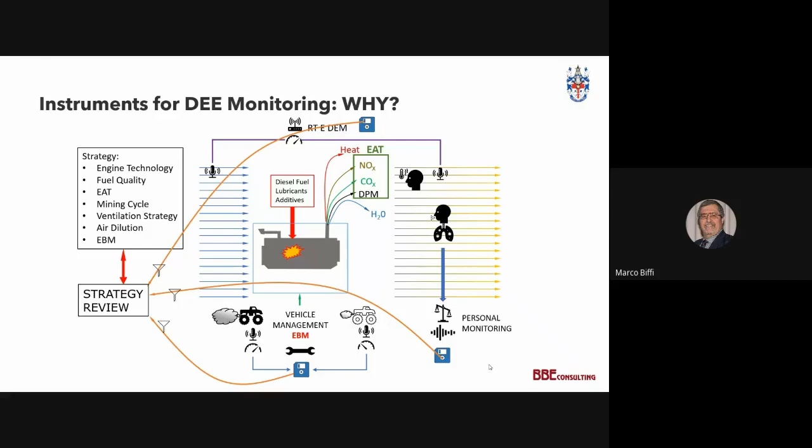So we can combine that with the other data to come up with a strategy, a new cycle that will tell us what acceptance levels. We know what we want in the personal monitoring. We'll talk about it in a second. What the vehicle should do, and also if the ventilation rates provide the right level of dilution. Next, please. So very quickly.

Managing carcinogenic substances, it's a stochastic effect. So what it means is that whereas we can talk about OELs for other substances, it doesn't make sense when it comes to a stochastic effect like carcinogens. So to talk about 160 micrograms per cubic meter, to talk about 100 micrograms per cubic meter, it's neither here nor there. Nobody will tell you that that is the case or that is acceptable. We're going to go as low as reasonably possible or achievable.

But to do that, we need to have the full picture, and that's what the instrumentation that we've just been talking about can give us: where are we going in terms of environmental pollution, in terms of engine performance, in terms of worker exposure right at the end.

Now, Andre, to answer your question, 0.06 cubic meters per second per kilowatt. The only time in those tests we did with Sasol that we got anywhere near 0.06 was with the high technology filter, with the regenerative filter with 99% reduction in particulate. That's the only time we could talk about 0.06. I agree, it was a tier 1 engine, okay, but with filtration.

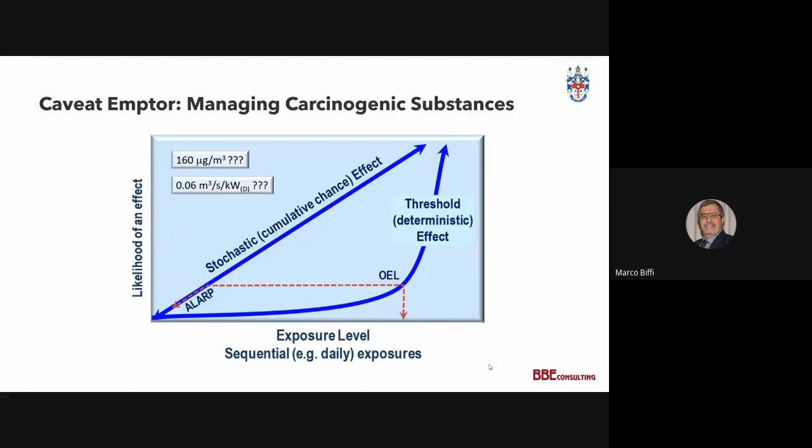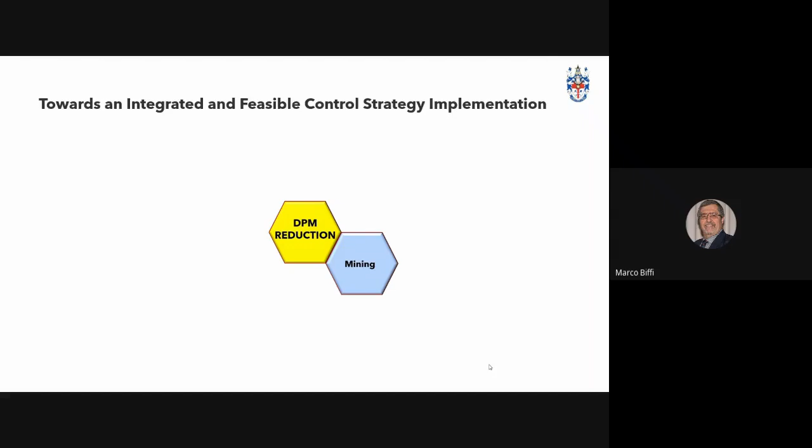Next slide, please. So, if DPM reduction is our target, is that what we want to do? How are we going to work together to do that? And it comes back to Cas's point just now. On one side, we have mining. They decide where they're going to mine, how they're going to mine, when they're going to mine. To do that, we've got engineering, which works together with mining in terms of maintaining the equipment, selecting the equipment, repairing the equipment most of the time.

Next, I like to put the ventilation, because it's one of the last or alternative ways of managing the emission if everything else fails. Next, we have the supply chain. Supply chain speaks to engineering and mining. That's why we put it there. And what's important is that mining selects the equipment. They talk to the supply chain and back again, and things like filtration systems should be addressed there and then.

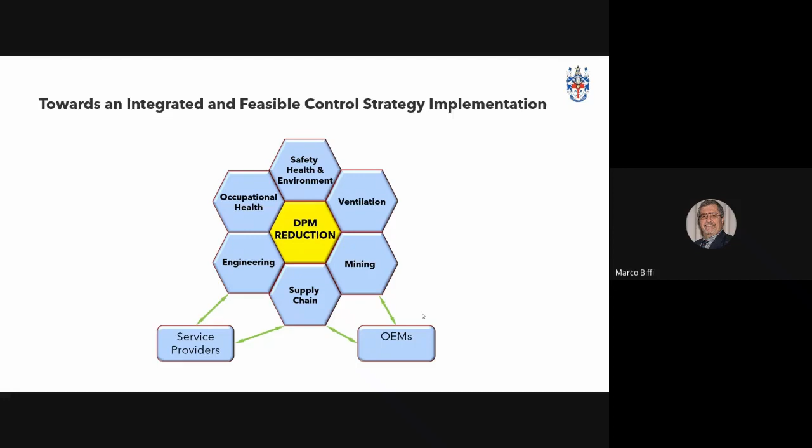It's engineering in terms of service providers, what fuels are purchased, what additives are allowed in those fuels, what lubricants, maintenance regimes, and other equipment. And the last bit, but definitely not the least, the occupational health and safety and environment aspects. Under occupational health, I would like to put the occupational hygiene and medical aspect of things, more towards the worker exposure and looking after the worker. And only then will we really have, in my opinion, harmony in this symphony.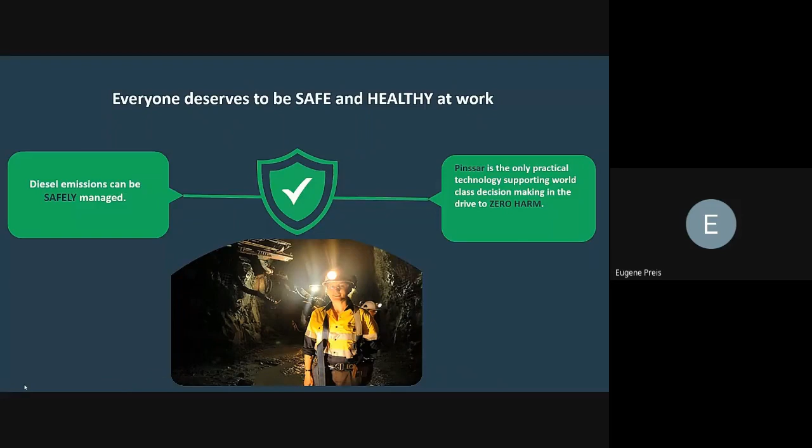At Pinssar, we believe that diesel fuel will be the predominant energy source underground, driving productivity for many years to come. And we also believe it can actually be managed safely. And with Pinssar being a practical technology, we're really supporting those decision-making processes as you manage your controls and work towards zero harm. The following slide will show a brief introductory video about Pinssar.

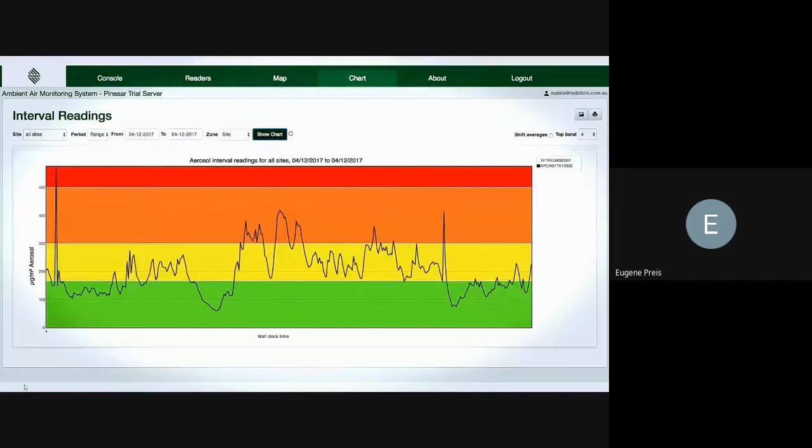Until now, there was no commercially available monitoring system available for harsh environments. The Pinssar reader is a technological advancement and is revolutionary in the fight to detect and manage diesel emissions. It's fitted with a reader dashboard system and continuously monitors and records DPM levels within the critical 0 to 800 nanometer range, sends live data to control and response systems, as well as nominated users on multiple smart devices, potentially anywhere in the world, enabling real-time action and decision-making.

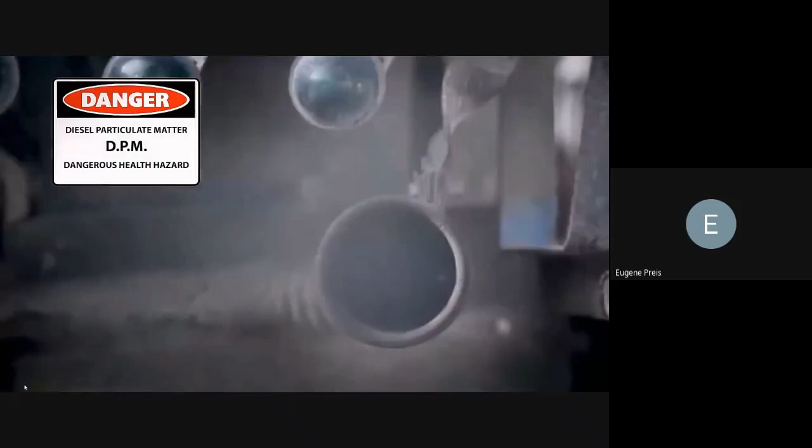It's able to detect and assess the presence of deadly DPM on a 24/7 basis, and DPM levels and trends, including shift averages, are continuously and immediately displayed along with key analytics. This allows global companies to monitor DPM data concurrently, continuously, in real time across multiple companies, divisions, and sites.

So what does Pinssar actually produce? Well, in consultation with some of the largest mining houses in the world, the discussion really revolved around the fact that it had to be an ultra-low maintenance product, which had to be robust for real-time continuous particulate monitoring because it was going to be in harsh environments. Now, this was the blueprint for the product, which was developed from the ground up. It's specifically designed for long-term deployment in very aggressive environments. It's now working in 6 continents, and very successfully with some of the largest customers in the world.

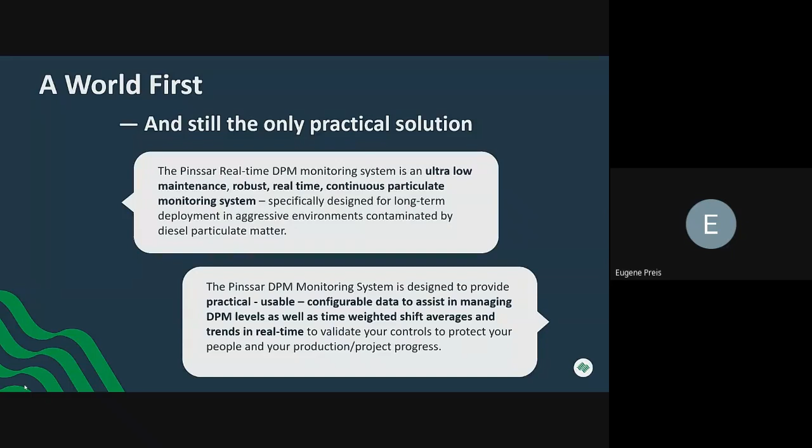So it's a very practical system, and really the practicality comes via the configurable dashboard, which is producing time-weighted averages, shift averages, 6, 8, 10, 12-hour shifts. You can look at data over a day, a week, a month, a year. And you're really looking at those trends over time. You want to know, is your DPM staying at the same level? Is it increasing, or is it in fact decreasing? And that's where the Pinssar system plays the biggest role.

So the existing technology is well known to the industry. Tailpipe testing above ground, gravimetric testing, and handheld monitors underground, which are in fact real time. They're just not continuous real time, and they require manual intervention as well as filters and change of batteries, etc. But they're all random intermittent spot checks, point in time validation. They're all part of the picture, but they don't form the whole picture. And what we believe is to manage your controls effectively, you really need to adjunct these products or augment them with 24/7 monitoring. And that's where Pinssar fits in.

That fixed time, real-time continuous monitoring allows you to validate controls and move very quickly on exceedances with control and responses. So it's a bit like finding a needle in a haystack without a fixed real-time monitor, because getting results back from a gravimetric reading some 2 to 6 weeks later makes it very difficult to circle back on what was the emitting technology, where was the exceedance, and how to control that for the future.

Almost impossible, in fact. But ultimately, what we'd all say is these systems work together in an ecosystem under the management of a diesel particulate management committee, which tends to be the missing link at most operations. And that coordination between hygiene, ventilation, fleet, and senior management, we believe, is critical in the process.

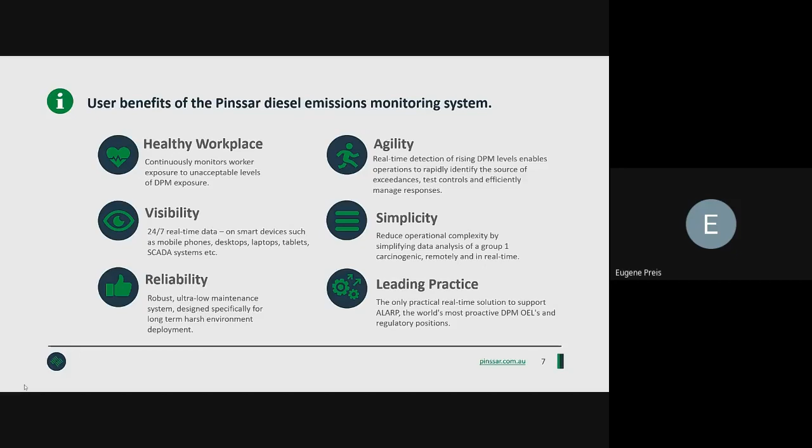And finally, the second to last presentation slide. The final slide will actually be an inserted video, which will show a ventilation simulation, which is enabled in this case by Pinssar, and we're uniquely positioned to do that. Now, in this case, it's a VentSim control and response system. Pinssar can, of course, enable other systems like Vuma 3D, etc.

And I guess the last trend I'd like to talk about today is VOD. VOD, ventilation on demand, whether it be full ventilation on demand or limited ventilation on demand, is becoming a bigger global trend. And it gives the customer ultimately the ability to reduce electricity usage and therefore derive a significant cost benefit from that technology.

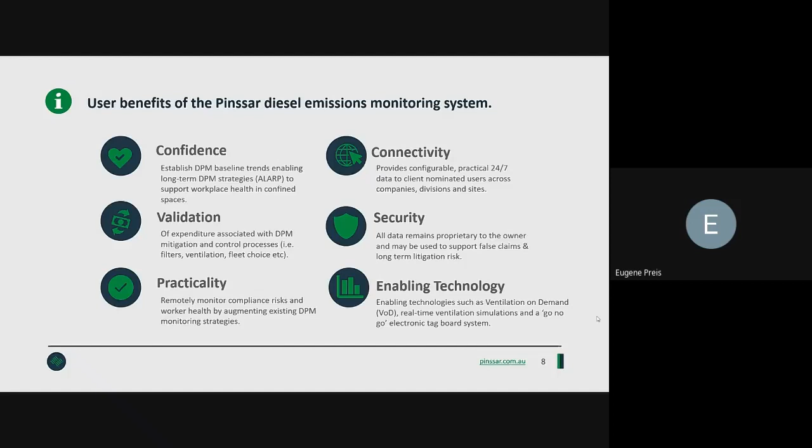Today I want to demonstrate real-time monitoring, in this case fixed real-time monitoring data, in VentSim. VentSim is used in mining as a tool to do long-term mine planning, ventilation planning, as well as day-to-day planning for the ventilation network. What you can see at the moment is a longwall coal mine. The two call-out boxes here are where the Pinssar units are installed. I'll start this model off.

So what you're seeing right now, on the right hand side here, is the time. Every increment's kind of like a minute, and like I said, it's 1 day's worth of data. So I'll start this model off. And as you can see, the DPM is already spreading through the mine, and it's 20 minutes into the model.

Zooming into a specific area, you can see there's a constant reading of a DPM of 0.04 more or less, and you'll see there a big spike come through. Could be that a machine has been working upstream of that sensor and pulling a load, and that DPM plume it created passed that point, and then that will go through the mine right out up to the fans, which are located here.

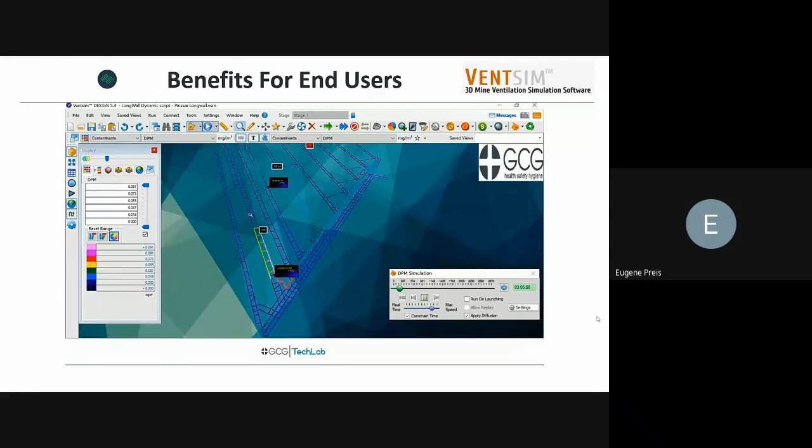Another nice function VentSim has is these data boxes. This specific data box displays the DPM reading in this airway as a live function. So whatever it sees there, it'll display in that data box. Obviously, nice to have it displayed up in a control room or shown in a presentation somewhere.

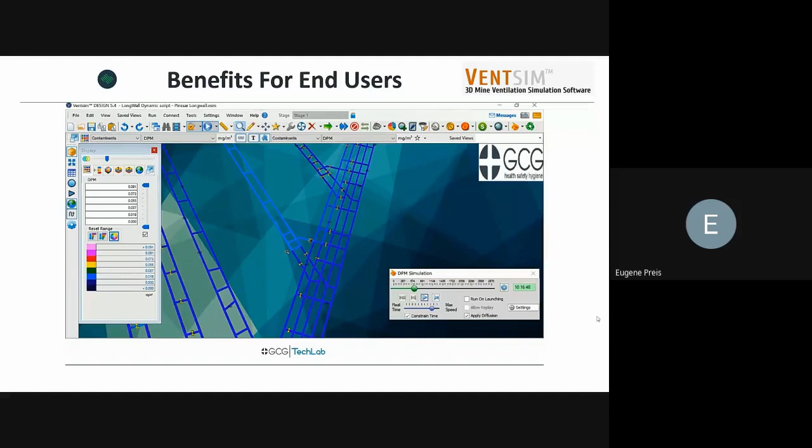To change your perspective on how we look at occupational hygiene risk, we're looking at this in real time or very soon after the exposure occurs, so you can take action. Whereas compliance monitoring is very reactive; there's not a lot a mine can do 2 weeks after an incident's occurred, or it's often very difficult to find out what went wrong.

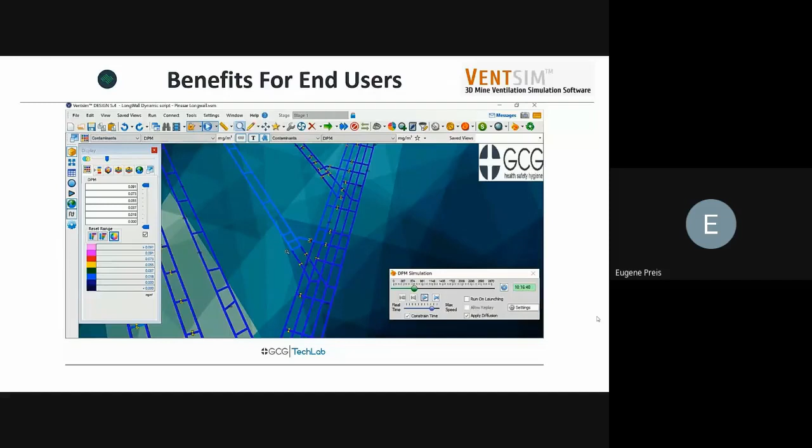So very handy to try and incorporate this on your sites, and this can be used all over: coal mining, metal mining, tunneling, which I think is a really interesting one to have this in at the moment, as well as buildings and workshops that have fixed airflow.